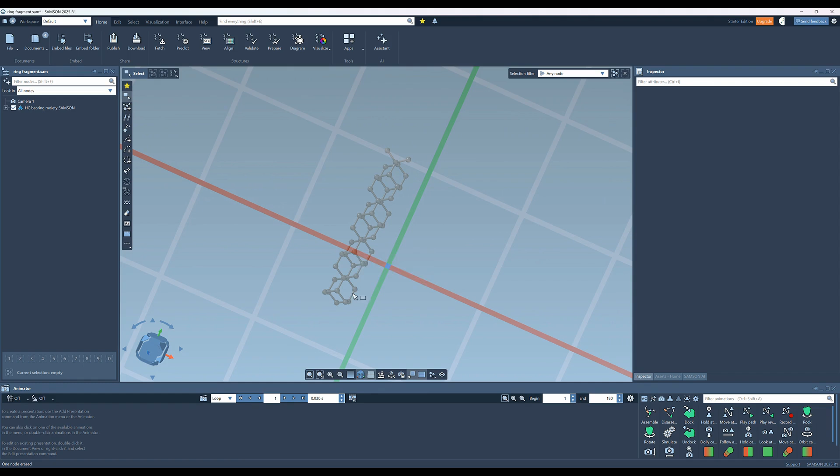Okay, so I have the inner ring fragment loaded into SAMSON. It's just a little chunk of diamond. Right now we're looking down the 111 plane. It's always the easiest to identify because there's these hexagons with little atoms or eyes in the center.

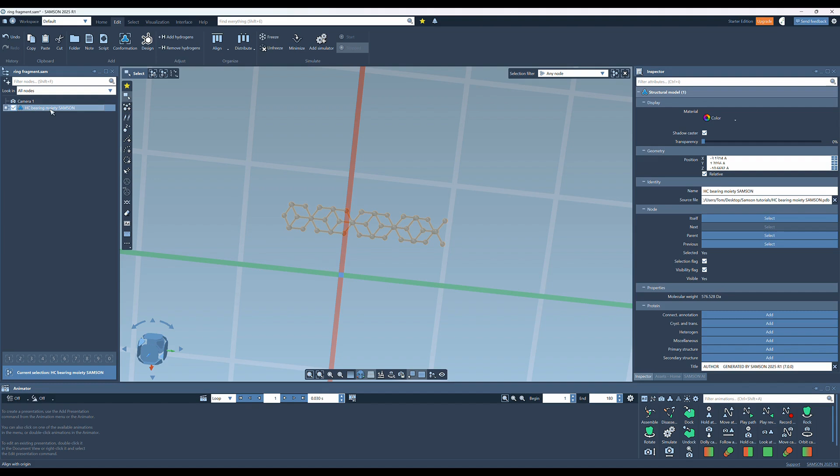Okay, so the first thing we're going to do is once you have it loaded, go into edit mode and we're going to first of all align it with the origin. It didn't move. Oh, let me select it. Align with the origin, and then we're going to align it with the z-axis. And let's straighten it up and look directly down it.

Okay, so for this ring, these atoms represent kind of the walls of the ring. So this might be the outside, this might be the inside. These bonds going across, that's the inside of the ring. So we're actually going to want to rotate this.

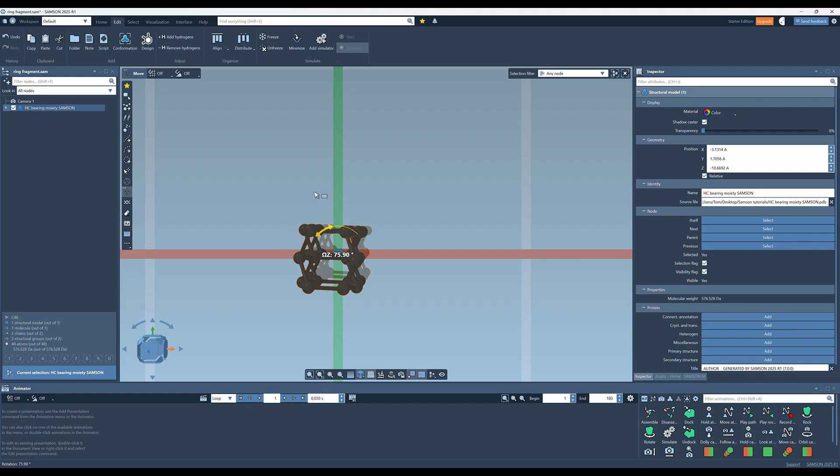So we'll just go to rotate and rotate it so that the walls are kind of along the x-axis, because when we extrude it as a ring, by default the center of the ring is going to be along the positive x-axis, somewhere over here. Of course you can move that, you can change that, but we're not going to get into it for this tutorial. So let me look. Yeah, looks pretty good. Maybe.

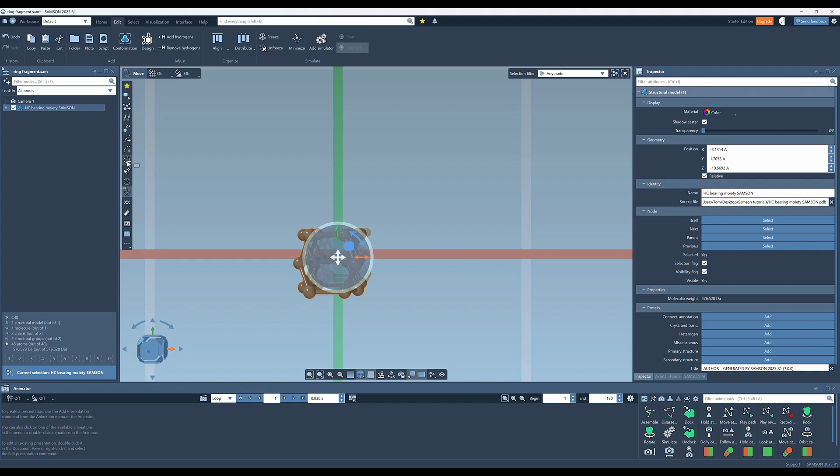Okay, so we'll select it and we'll go into this. I would call it extrude as ring, but it's create circular pattern here in SAMSON. So we do that, and this is what I mean by the center of the ring is along X. Let's expand it a little bit so that we're basically looking at how these atoms here overlap. Where they overlap, they will eventually be merged after the extrude operation is complete.

And yeah, the inner ring has 26 cages or repeat units. I've been practicing. This isn't the first time I've done this tutorial, so I already had it set at 26, but you can change that.

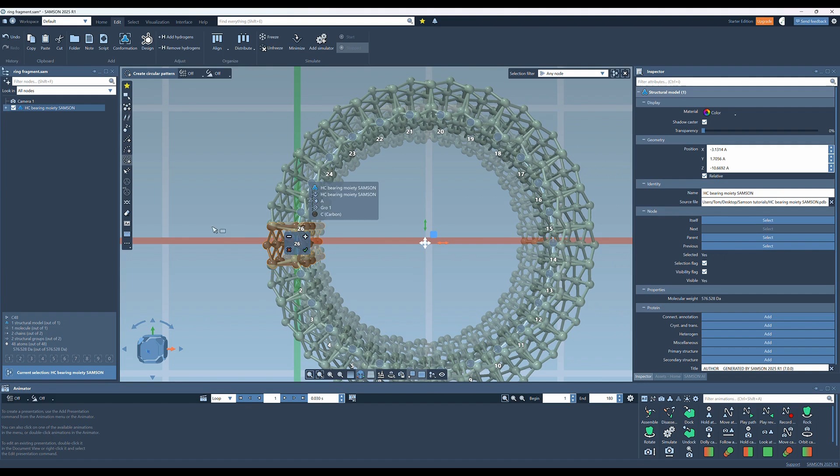Let's maybe just drag it a little bit more. Okay, so it looks like we got pretty good overlap here. Let's take a look at the side. Yeah, it looks pretty good. Okay, so we'll just confirm the operation. Rotate. Looks pretty good. Okay, so we'll select it.

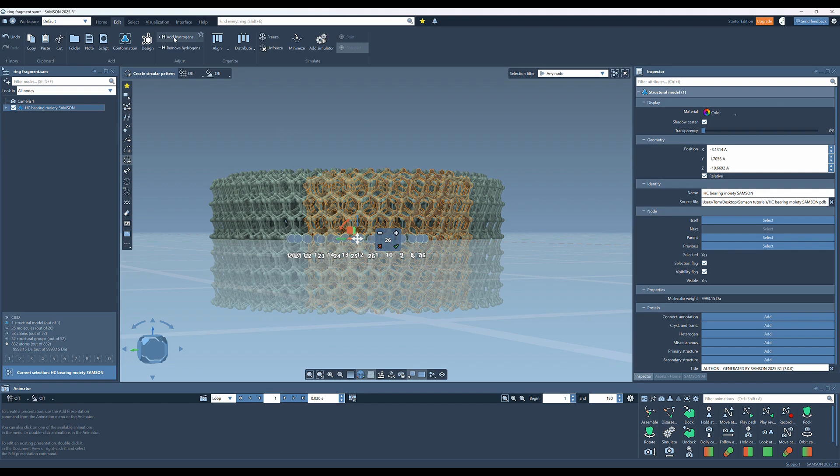Now let's hydrogenate it. So select it. We're still in the edit mode, and we'll add hydrogens. Oh, wait. So you don't actually want to be in the extrude when you do that, because now it's going to try to extrude a ring of rings. So just get out of there. And we've added the hydrogen. Looks pretty good. So that's the inner ring of the bearing.

The outer ring is created the same way. There's just instead of 26, there's 40 cages or repeat units. So we'll leave that as an exercise for the viewer.